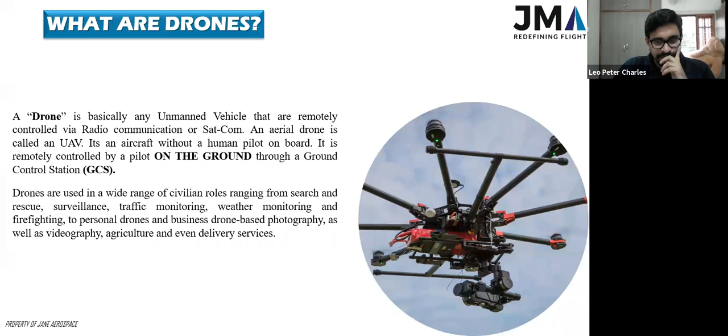So what's the history behind drones? That's another thing we'll have to look at. You would be surprised to know that the first drones, or something closely relatable to drones, started way back in 1849 when Austrians tried to attack Venice. They had these hot air balloons filled with explosives, and they tried to move them over Venice and drop those bombs. Unfortunately, due to wind conditions, those balloons came back - that's the story. But that's where it started. People realized that if you could control a device from a longer distance, you could fly it remotely. And that's when it started.

Again, in World War One, we see the British developed the Aerial Target. It's like a targeting system for aerial practice, rocket powered. That system was used for target practice - so that is also a drone. It was initially controlled with a preset trajectory. From there, we see the Curtiss N2C-2 drone - they started in the 1930s, and by 1937 they finished it. That drone is the first of its class where it was fully remotely controlled and was used for surveillance.

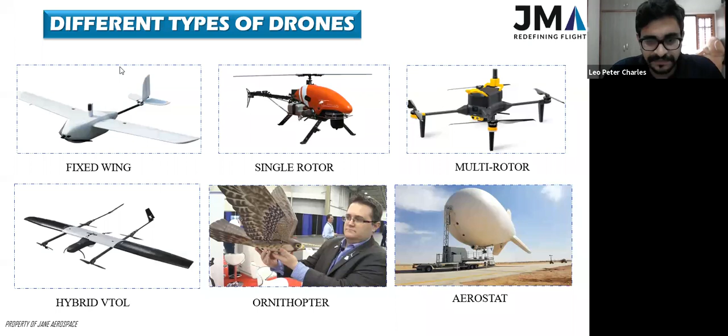Artificial intelligence. So this is a very nice concept, a lot of misconceptions around it. I will try to explain to the best of my ability. So artificial intelligence is basically a computer trying to mimic the human brain. So how does that basically work?

Now, if you tell a kid or a baby, don't touch fire, that's a direct command, right? If the baby does not understand that, it will still go touch the flame and it might burn its finger. But now there's a feedback that the baby's brain has already got, that if you touch fire, you will burn your finger, which is bad because you will feel pain, right? Now, with this, the baby has learned that it is not supposed to touch fire again.

Artificial intelligence works in a similar way, where a feedback loop or a feedback network helps its algorithms to evolve. Evolve would be a very liberal term. It's algorithms adapting to changing environments. This is done through various methodologies where different levels of programs stacked over one another take into consideration what each output is and then try to give the final output in a different way based on the data set it acquires. So this entire process is called artificial intelligence.

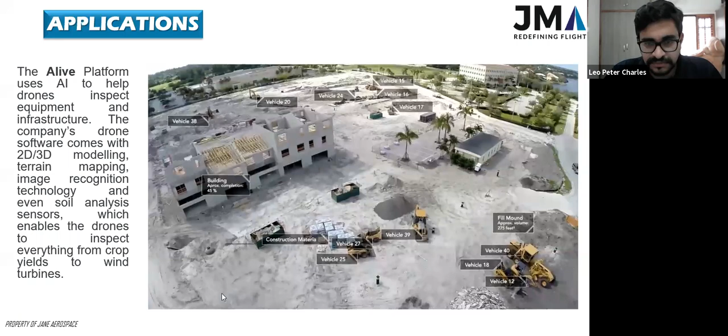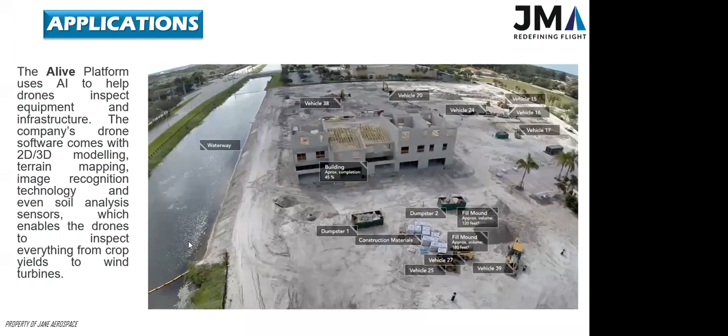So I was talking about the platform where you do asset detection and management, right? Here you can see this is real time, not post-processing image. This is the real-time feed where it goes to a ground station, and it detects vehicles, dumpsters, construction material, building completion level as well. What they do is put a full scale model into the software, and then based on that, the AI software is contemplating the approximate completion of the building. So this is real time. That way, any command center set up by construction companies at their corporate headquarters can see at different locations what the inventory is, what's the completion level, so on and so forth.

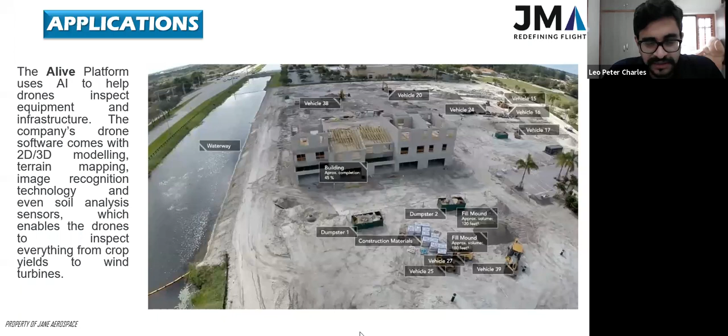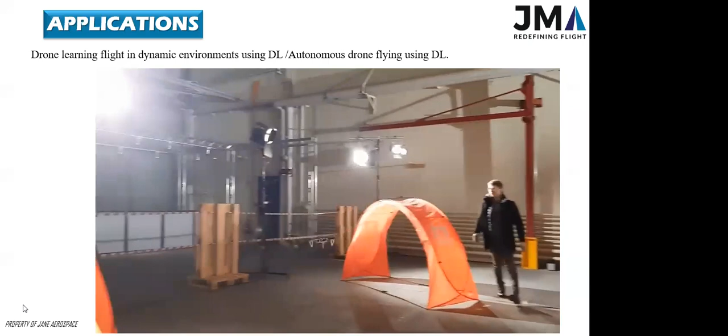This is drone racing from the University of Zurich, a very interesting use case of dynamic obstacle avoidance plus dynamic pathway planning. It combines a convolutional neural network with state-of-the-art trajectory generation and tracking. We demonstrate our method in an autonomous, agile flight scenario, in which a vision-based quadrotor traverses various racetracks with possibly moving gates. Our method does not require any explicit map of the environment and runs fully on board. We extensively test the precision and robustness of the approach in simulation and in the real world.

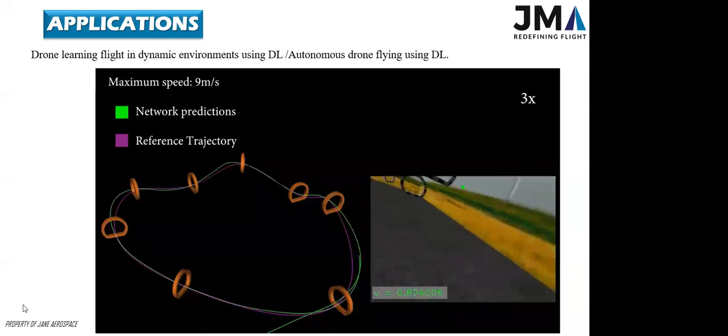A CNN directly maps raw images to a direction and a normalized speed, which can be scaled by a maximum speed at test time. Direction and normalized speed are illustrated in green in the first-person view image on the right. The network predictions are then used to generate a short trajectory segment in a receding horizon fashion.

To test the generalization abilities of the learned policy, this algorithm is now learning how to fly through the gates while they are being moved, dynamically shifting each gate in a sinusoidal pattern along each dimension independently. Despite the gate movements, our approach can complete the track without crashing.

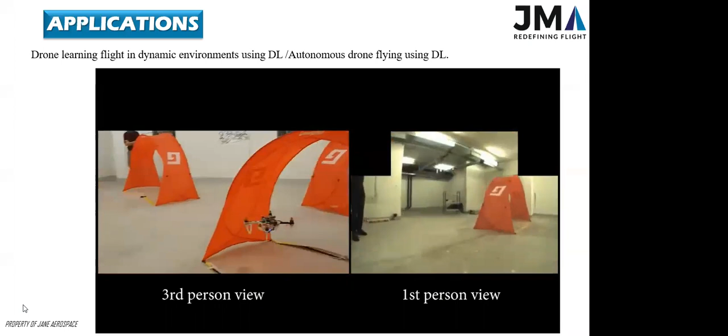As in the simulation experiments, we test the generalization abilities by deploying the system on a dynamic track with moving gates. In the first lap, the track is in the standard configuration also used for static experiments. While the drone is starting its second lap, the gates are moved and the drone has to adapt its path. You can see that they actually moved the gate and the drone changed its trajectory.

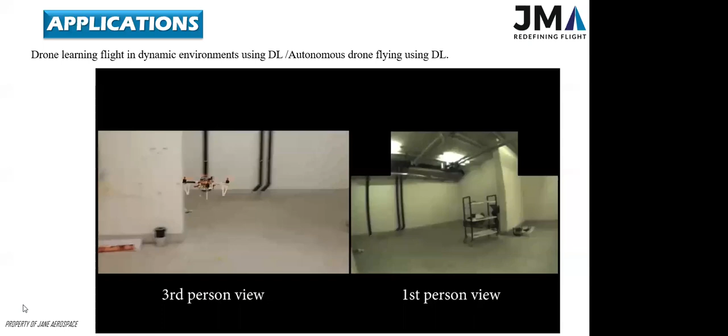So this is the future of drones flying inside your house. Maybe somebody wants a spoon to be given to you, and I think a drone can go pick it up and get it from the kitchen.

Again, same as in the simulation experiments, the system can generalize to dynamically moving gates, also on the real track. To show that the network is precise, we challenge the drone to pass through. So it's now flying in these conditions as well, where the pathway is so narrow it has to avoid all of that.

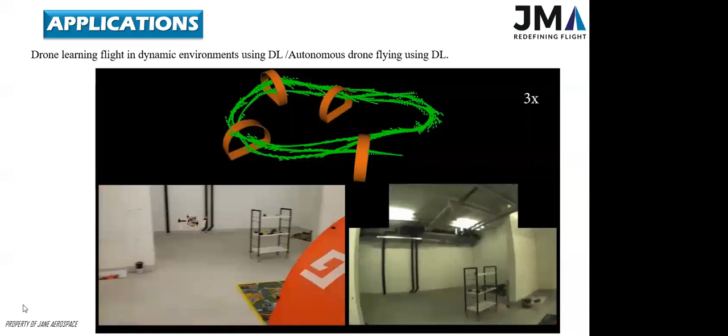Trajectory segments of the quadrotor over time: already after one lap, the visualized trajectories are misaligned by a large margin. This is due to drift in state estimation and would lead to certain collision in a pure feed-forward setting. However, since our approach plans in body frame, it is not affected by drift in state estimation and can therefore still successfully complete the track.

Our approach can cope with a large set of simulated and real environments. Despite large motion of the gates, the quadrotor is always able to precisely track them and fly through, even when the vehicle barely fits the gate.

So basically, this is the future where drones will be used to fly in tight spaces and ever-changing environments. A lot of people ask: what if a bird comes and strikes the drone? I think that whole concern will go away once drones are able to avoid dynamic obstacles and predict trajectories of incoming obstacles as well.

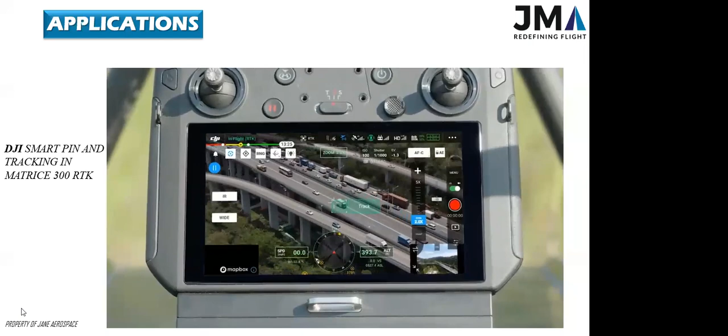Track immediately: during Smart Track, the aircraft will keep hovering. The distance between the subject and the aircraft is displayed in the app in real time, along with the real-time location information of the subject. The best part is that you just push the forward stick, and...

The drone will keep following the vehicle or object of interest, and you don't have to fly it sideways, left or right. You just keep pushing forward, and it keeps following wherever the vehicle goes.

Tap the orange icon. This is the smart pin option, where you click on the object and it gives you the location or the geographic coordinates.

So now what is great about it? See, if I see something, I can only tell the distance, and that is also from years of experience, right? But I cannot tell it very accurately. Here, with perception, the computer is able to analyze how far the object is from its own position.

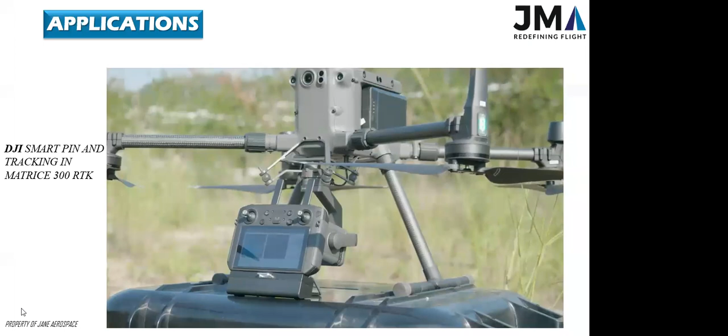This is a very interesting concept where even thermal images need reconstruction in real time to find people in dense foliage. This drone is coupled with a thermal camera and an AI computer on board. For the naked eye, there's nothing visible, just trees. When you view it in thermal, you can only see small traces of people, but you don't know whether it's people or not. Now they will do integral reconstruction of the thermal image.

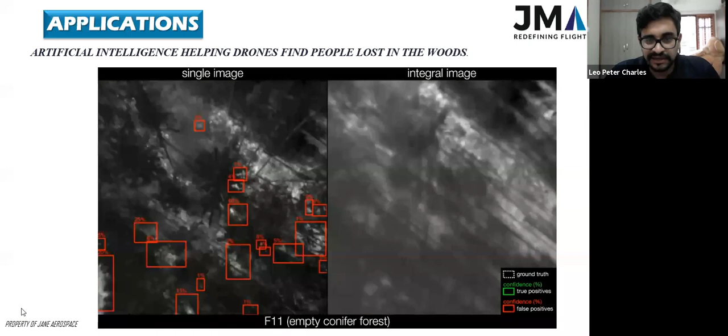This is an integral image and this is a single image. There are only certain areas, like your palm, your ears, your feet, that exchange heat with the surrounding. They're like the cooling off parts for you. So with that, an integral image is able to sense the orientation of the person. Are they fallen down? Are they walking? Is it really a person? With dense foliage, this reconstruction lets you understand where actually people are.

So this can actually help. Search and rescue is a very complex situation. Let's say you have very thick forests, and the forests are absorbing most of the heat emitted from your body, and it becomes difficult to find people. In that scenario, how do you make sure your captured images can be immediately enhanced to spot people who need to be rescued?

That's where AI comes in. It keeps learning from the photographs you take, as well as stock images already available, and human anatomy. You can rebuild the human body's thermal signature on the spot, and then have somebody go take a look at it. That way, the crucial time to find somebody before it's too late is not wasted. That's a beautiful use case of AI in drones.

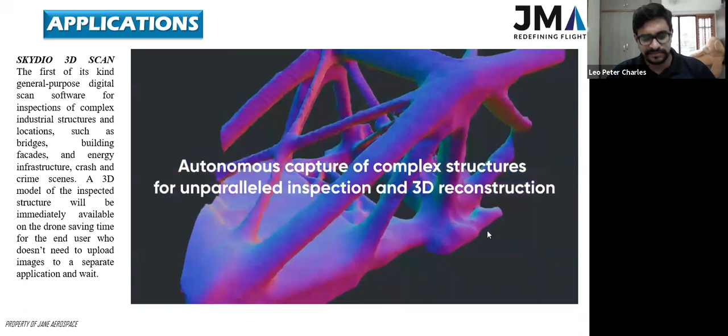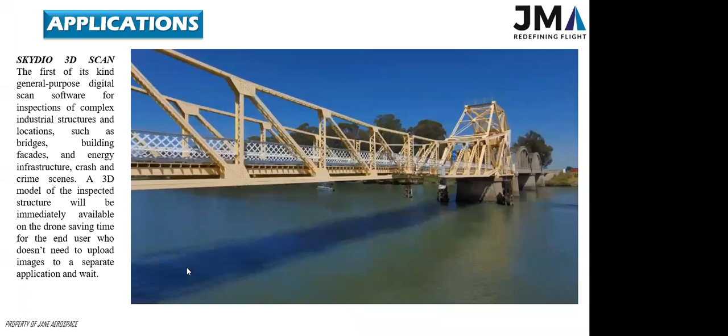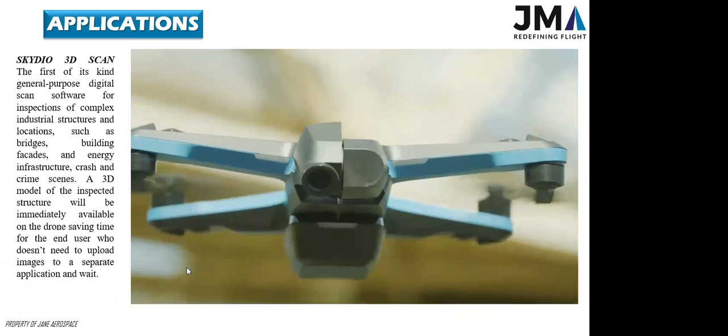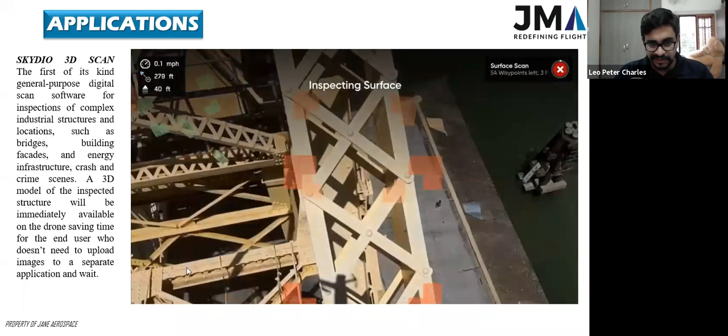So a drone is performing an inspection of the bridge and building the 3D image in real time. We set the surface, telling it that's the surface of the bridge. Now the drone starts to learn and adapt and will fly inside those parts wherever possible between the trusses to reconstruct the image in real time.

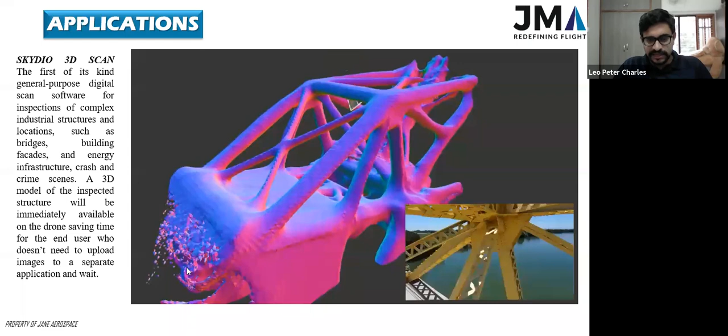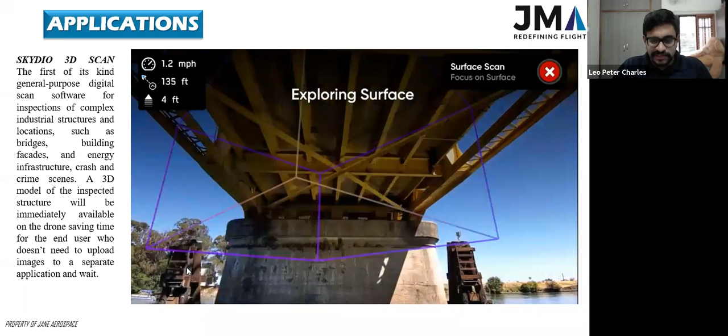So this is the real-time reconstruction that's happening. AI-based computing is helping build this image in real time. You can see it's even refining the image as more photographs come in. Trust me, if somebody had to fly this manually through all of this, there's a 100% chance we would have crashed it into the bridge itself.

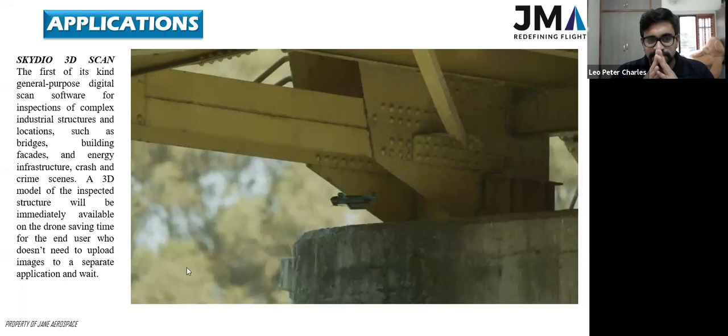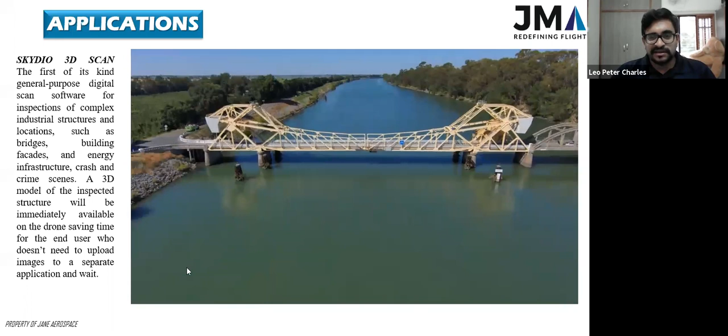I have done bridge inspection on a larger scale with the Matrice 300 RTK. It's really scary to fly even with 360-degree obstacle avoidance, because you never know when wind might come in and drift your drone towards the wall. And that's the entire bridge shot, so you can fully 3D construct the bridge.

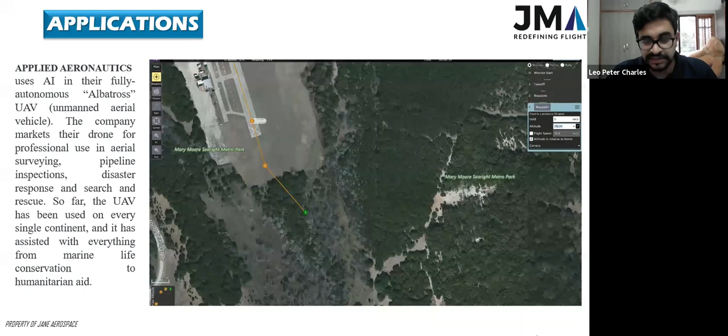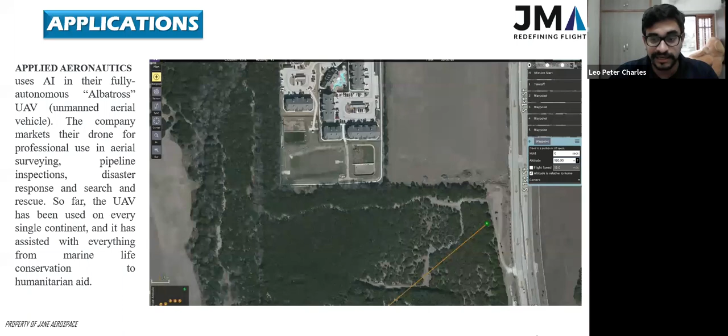This is a coordinate setup for a fully autonomous flight. You just put in where the drone has to fly, and the drone decides what speed to take off at. This is a fixed wing drone, so it's not a vertical takeoff. It has a runway, it flies through the runway, then takes off, and it has to cover these waypoints. You'll see different altitude settings at different waypoints being put in. The drone will also have to gain altitude, which normally happens by flying in circles.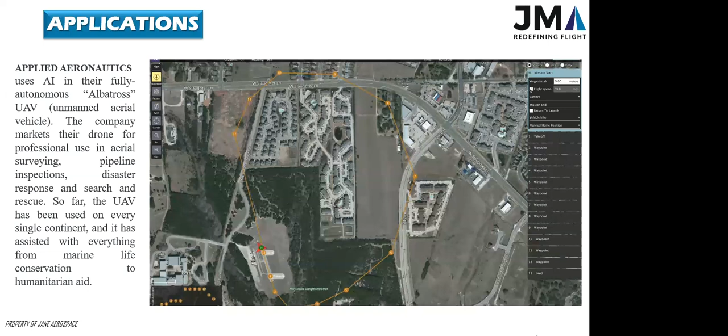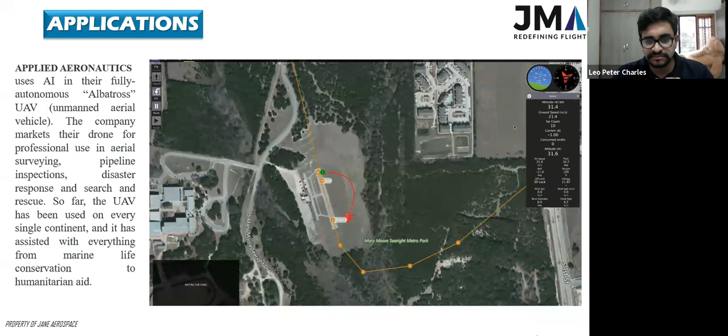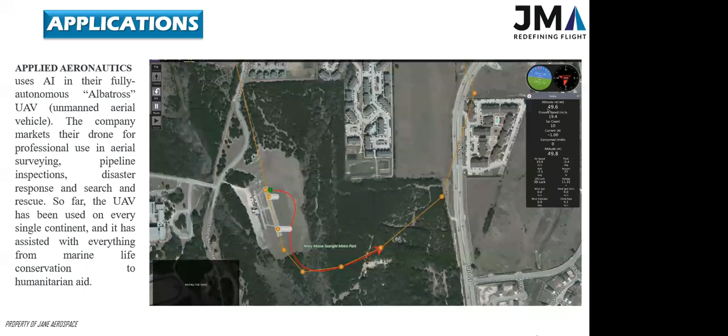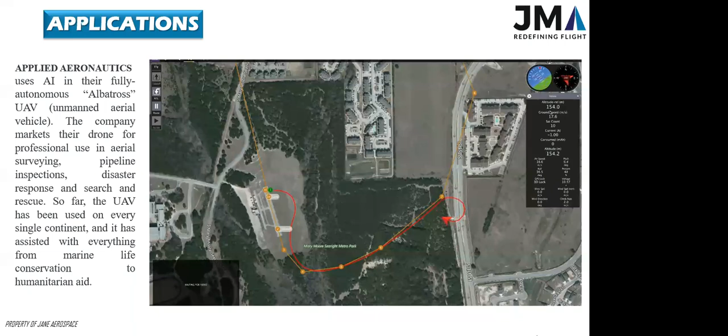Now you can see they will initiate the flight, setting flight speed. The drone's onboard computer will have to adjust for altitude, varying wind velocity, crosswinds, and the different altitudes at the waypoints that have been set. They're simulating it. You can see how it's changing orientation based on the waypoints, and now it's gaining altitude, then flying at the predetermined altitude.

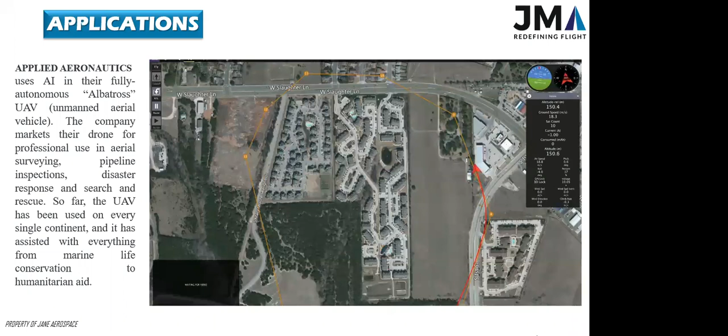This is fully autonomous. Nobody is flying the drone. This way you could map large areas. Let's say you have a pipeline, you just put waypoints on the pipeline and the drone will fly over it. It's one of the simpler functionalities of autonomous missions.

Now it will go into a circle to decrease its altitude. And then you can see there's altitude reduction as well.

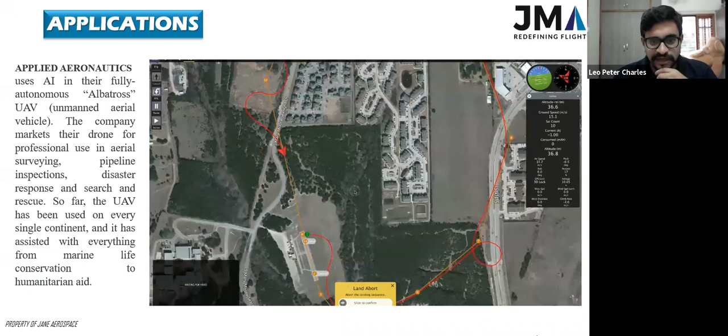So this drone was basically catapult launched, that's why it didn't need that entire runway. But then for landing, it has to take the runway. So this is another application.

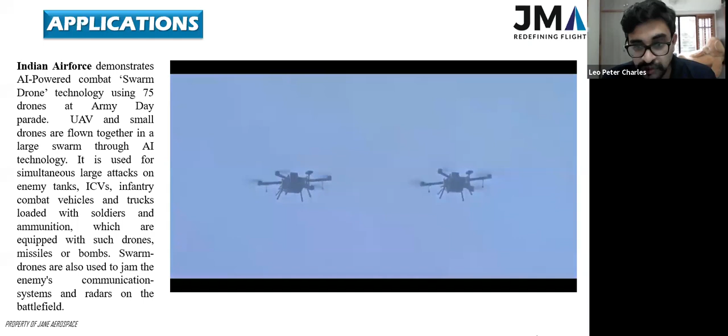Okay, this you would have seen in January this year, on Army Day, the Indian Army demonstrated the drone swarm capability it was building under the IDEX program. The company that built this is from Bangalore, called New Space Research and Technology, where they have more than 75 drones flying simultaneously, performing different types of missions, and also some drones carrying smaller drones. The smaller drones are kamikaze drones, which have explosives in them, and they find the target, go to it, and then explode. All of this is autonomous, where drones are finding their own targets, planning their own trajectory, and also planning the explosive.

Some of them are hybrid drones that are running on fuel as well. You can see one drone drop off from the main system, a smaller drone dropping off the bigger drone. So you can have mini swarm capability as well.

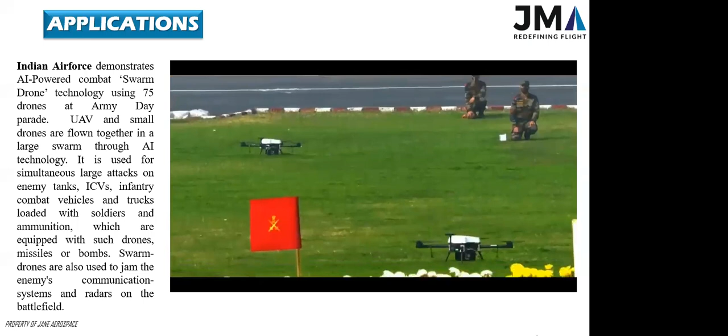This project is currently going on with the Indian Armed Forces.

So that is some of the applications. There are numerous applications as well, such as building bridges. Now they are training drones to build cable bridges during times where bridges get washed away.

Recently when I was in Uttarakhand flying for the NDRF, 6 bridges got washed away, and we had to use a drone for pulling a pilot cable. But imagine if we could actually build a cable bridge instead, where 5 to 6 drones which have strings or ropes attached fly in dedicated patterns that could build a cable bridge across. You can instantly have cable bridges across and resume logistics, because certain of these bridges are very strategically crucial and it had to happen at a very fast pace.

So most of our research organizations, including the IITs and the Indian Institute of Science, are building AI-powered drones for various applications. The Rustom 2 also is being developed with AI capability in mind.

We have another company in Bangalore called Aadhya Aerospace. They have a very nice use case where they're using AI-based software to monitor the health of the drone itself. In that way, you know exactly when your drone has to go for maintenance, in case it crashed, what would have been the reason, what is the life cycle of your battery, the life cycle of your motor, and whether there is a certain component in the electronic circuitry or the avionics that might fail faster. So all of this they have been working on.

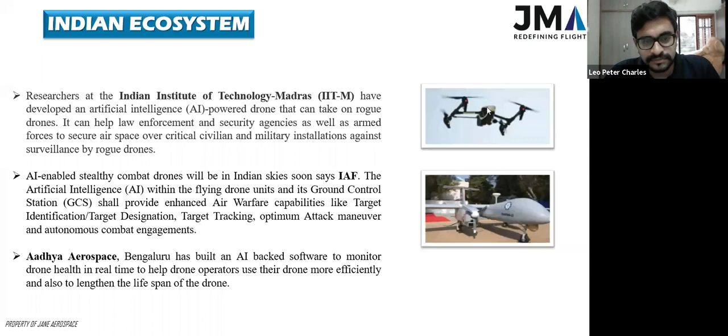So that brings us to the end of the major presentation. I'll just take another 2 minutes.